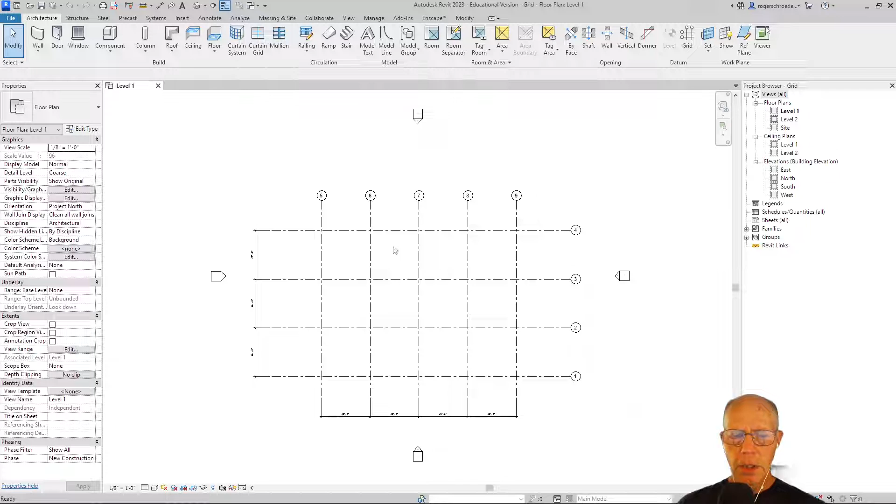This grid is 4 bays wide. A bay is the space between those grids. So I have a 4 by 3. Each one of these is 20 foot by 20 feet. If I zoom in here, you can see that I've dimensioned these already, 20 foot by 20 foot. That means that between the columns we're going to place at these intersections, we'll have a span of a beam of 20 feet, which is a very reasonable length for a beam.

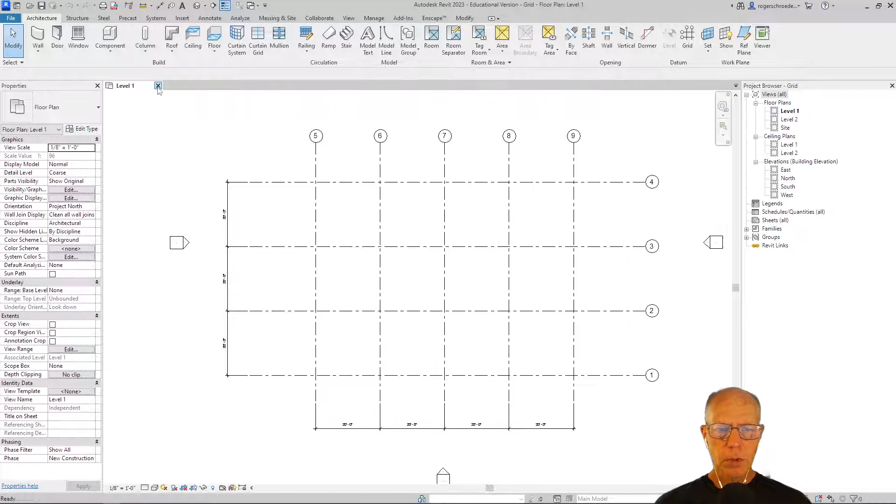So let's get started with a new document. I'll close this one off, and we'll go ahead and open up a new architectural template, and we'll end up on level 1. First thing I want to do is make sure I have the architecture tab selected, and the grid selector will show up, and I can start building grids right away.

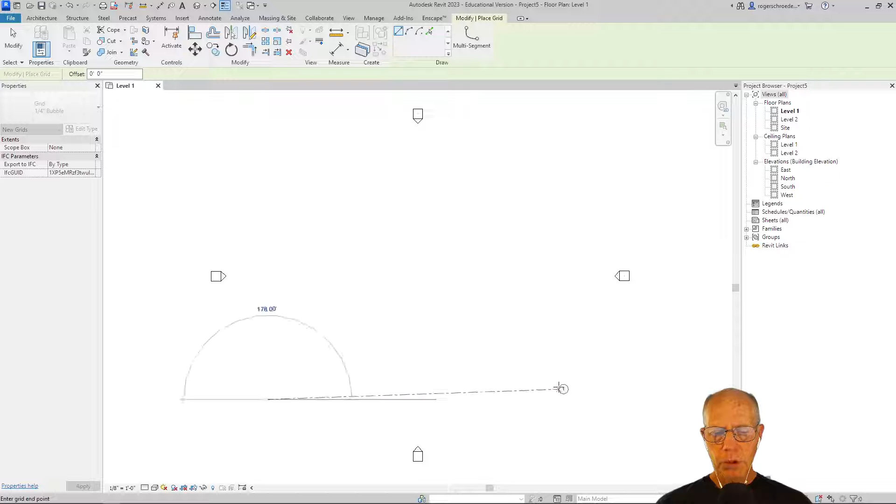So I'm going to come down to the bottom left corner here to draw my first line, keeping in mind I want to stay within this region of where the tick marks are. I'll click and drag, and I want to make sure that I'm 90 degrees with all of these so I get that blue highlighting line. I'll come over here and complete my first one, and then I'm ready to start the next one.

Coming up 20 feet, you can see that on the screen. It happened easily for me that time. Come over, and I want to make sure I have that blue line indicating that everything's aligned. It's really important that we work precisely.

So if I can't get my 20 when I move up there, one of the shortcuts then, once I have that blue vertical line highlighted, meaning that I'm aligned with the bottom start of the grid, I can just type in 20, hit return. That'll automatically mark that point, and then I can just drag over until it aligns on the other side.

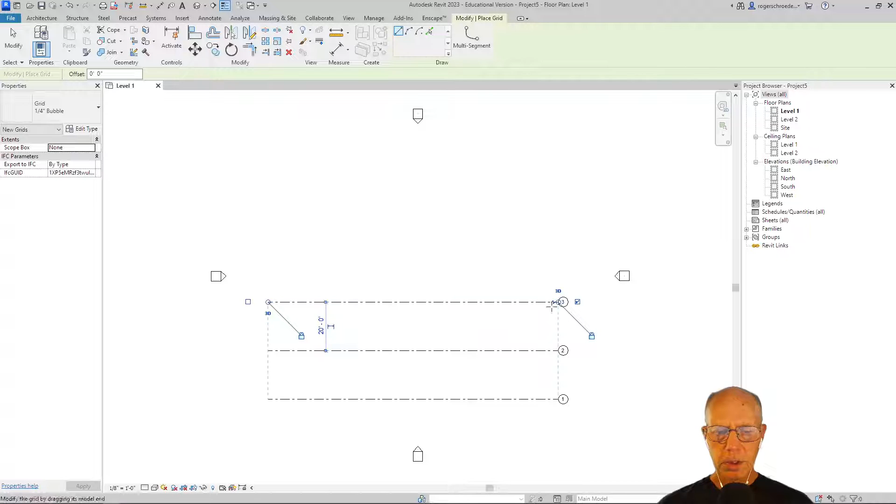And I'll make one more here. That'll give us our 3 bays deep. Notice that everything's in alignment. I have the blue horizontal line sticking out and the blue vertical dotted line.

Okay, so let's make some vertical ones now. Start down here and carry it up. The next one over, we want, again, 20 feet. I'll type in 20, noticing I have that blue dotted line indicating that I'm right at the edge of the other line. I'll hit enter.

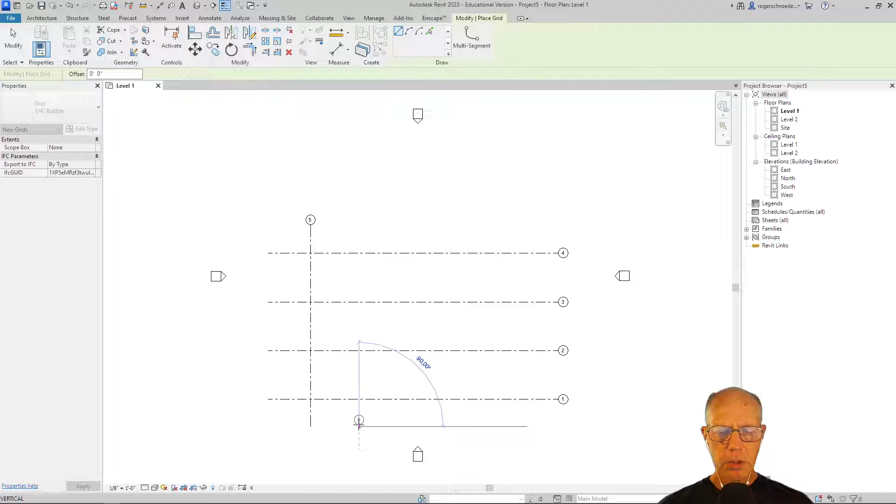That marks that first point, and then I can drag up and click, and we'll just continue to do that. I'll type in 20, up, and click. Back down again, 20, up, and click. And then that's 3 bays, so let's go 4. I'm going to do 20 again, and come up and click.

Okay, so now you'll notice my grid is a little bit out of the center realm of things. So what I'll do is I'll just grab them all, use my move tool, and kind of slide this up until it's closer to being more reasonably aligned within those tick marks.

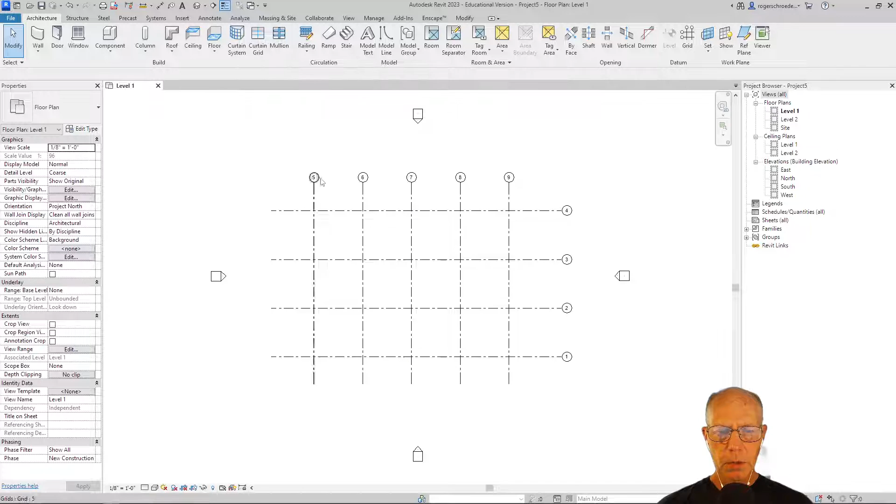Now notice these markers coming up this way are closer to that first grid line than in this direction. I can easily make those about the same by just selecting on any one of these and then just grabbing that little circle in there. I'll zoom in so you can see where that circle is. So once I highlight it, that little circle will be indicated, and then I can move that back and forth, and all of those will stay aligned with each other.

So now we have our grid in place. Next thing we'll look at is, well, let's take a peek and see what we've done. Let's go to our 3D view. I'll create the first 3D view for this. I'll double click under view, and then the doghouse. You can see our grid laid out at level 1.

Next thing we're going to do is look at adding the appropriate levels for the project we're going to do, and we'll do that next.